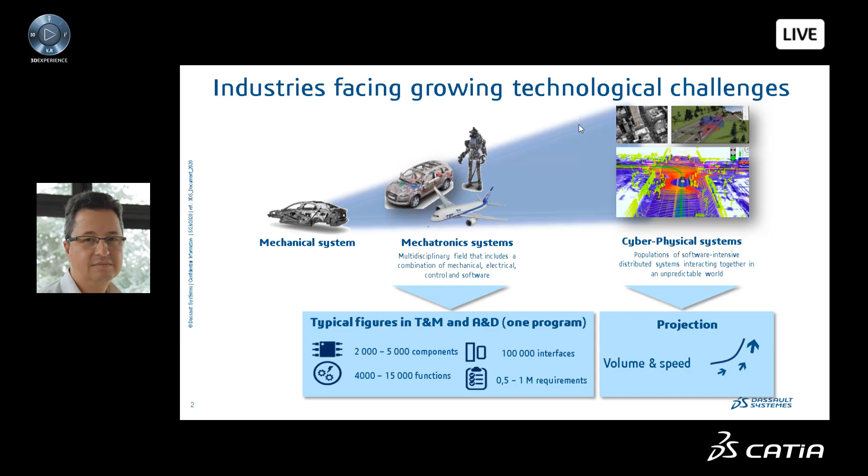State-of-the-art practices of system engineering is mainly document-based in the industry. The drawback is: how can you ensure that all engineering documents are consistent together, how they are synchronized, how can you ensure that a given specification is consistent with a design, is consistent with a test, all of that with many updates at many levels, at many disciplines in the time frame. Also, many errors are introduced in the early phases of the development program, and they are detected very late in the process. So how can we ensure that current state-of-the-art practices are suitable to this world of cyber physical systems?

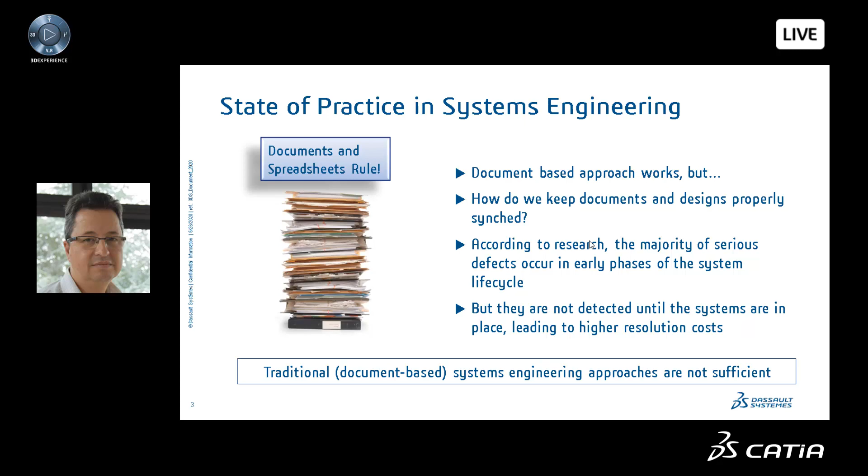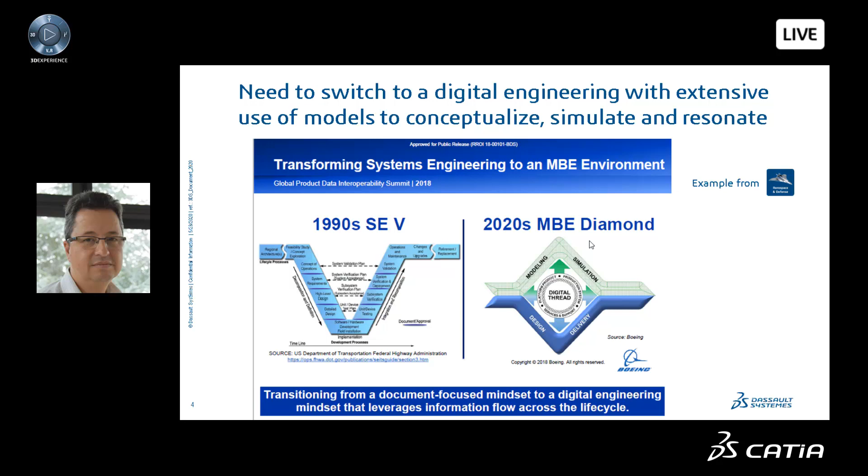The response is obvious. We need to switch to a digital engineering with the extensive use of models in order to resonate, conceptualize the future system and simulate it. Companies are transforming themselves, and we speak here about the digital thread, where we can have a digital continuity, a digital twin from the early design down to the delivery of the system and the in-service. Model-based system engineering is one of the first elements of this digital thread.

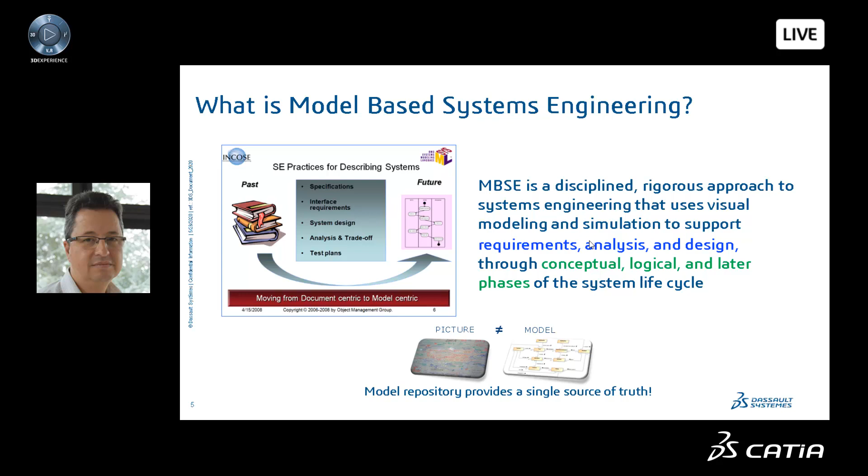MBSE is simply the use of models for system engineering. It allows covering different activities of the engineering, such as requirements, system analysis, design, etc. We speak here about defining a model, meaning objects that are reusable, where you can also simulate them, not about drawing pictures which are not a system engineering reference.

What you see here is a very short illustration of what is document-based system engineering and what is model-based system engineering. Model-based system engineering really helps you to resonate on your system. What are the scenarios of your future system? What is the behavior of the system? And then, of course, what are the requirements of the system?

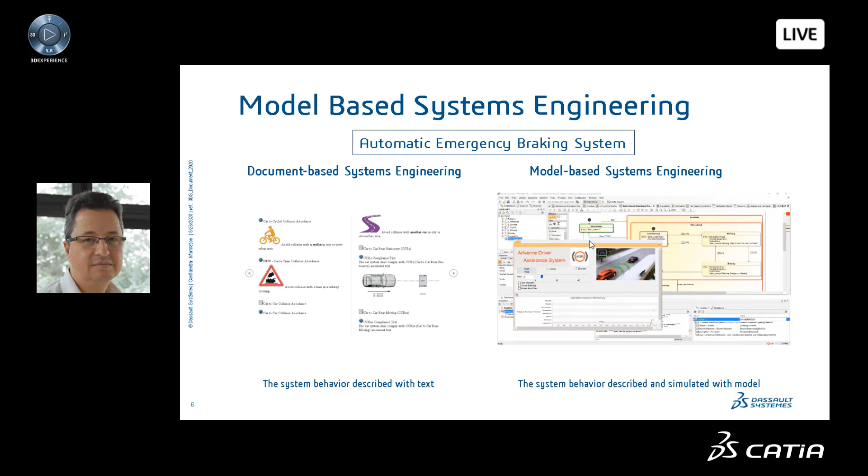And the system model is key. It's key because it helps you to define your targets, your scenarios, your missions. It helps you to define the interfaces between the components, and define the behavior of the interfaces dynamically so that you can drive the design of the product with all the disciplines. So it means that you can specify: from the system model, you can define system requirements so that you can specify the different components and the different behaviors that the components will have.

Also, it helps you through some simulation to make system analysis, to simulate the behavior of the product very early in the conceptual phase where you don't have any product. And also later on, when you have some first virtual component, to simulate progressively to achieve integration, verification, validation, and to ensure that you meet the targets defined early in the program. Of course, this needs to involve all the ecosystem, the value network. It's about collaboration between disciplines, but also between the suppliers and the OEMs.

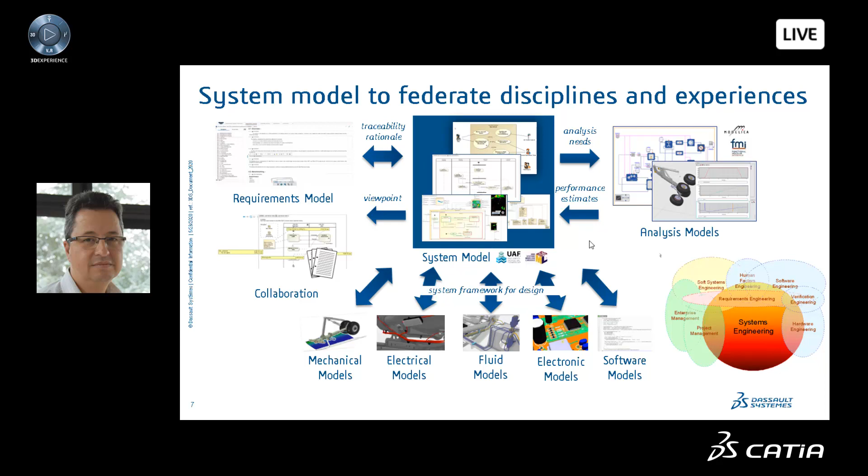To achieve MBSE, you need best practices. That means defining proper system engineering methodology, supported by some tools. We have developed at Dassault Systèmes a methodology called MagicGrid, which is applied to the Cameo Systems Modeler, and now extended to overall development with Cyber MagicGrid.

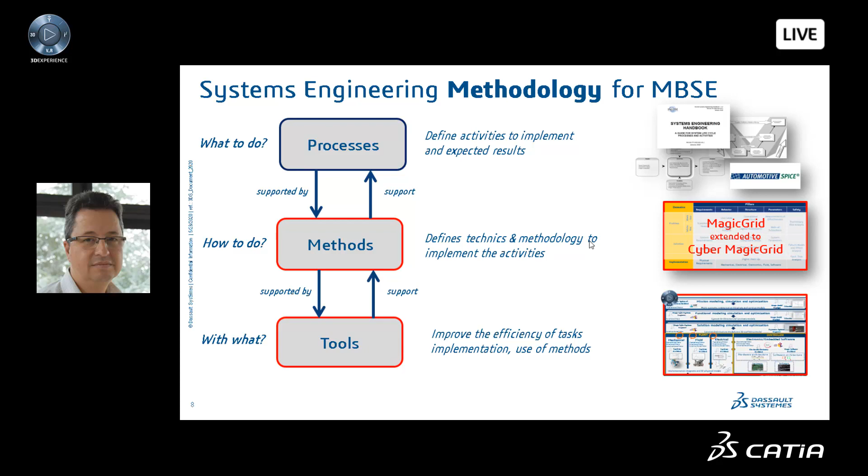The principle is simple. You define a framework so that you can manage different layers of abstraction, and for each layer of abstraction, you define different pillars, different points of view, so that you can see your system against these different points of view. This helps you ensure a complete and consistent analysis and definition of your system.

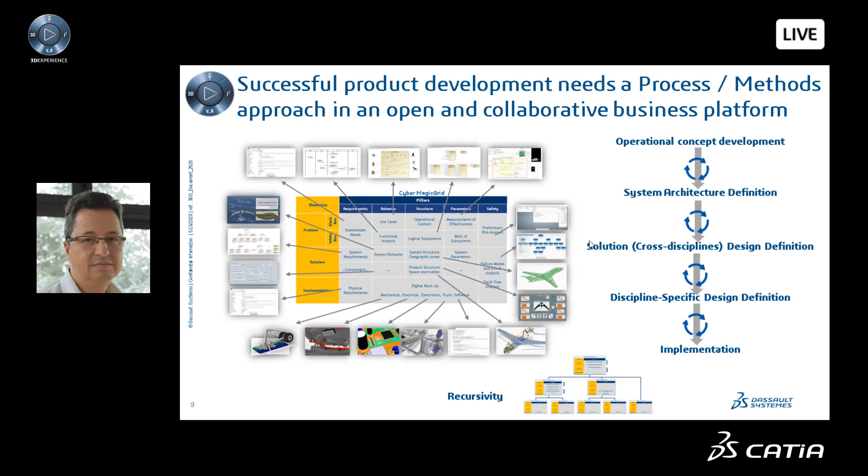The benefits of MBSE are really to master complexity, master interfaces, considering both the static and dynamic aspects. Also, if you have proper best practices in a modeling and simulation approach, it helps you manage uncertainties all along the development process.

With simulation, you can take front-loaded decisions so that you can mitigate risk very early in the development process and avoid reworks and redesign late in development.

Also, with proper end-to-end traceability, you can really master the impact of a change, considering both a change on the needs and a change on the implementation or design of the product.

And it also helps you globally reduce your rework loops so that you can be more efficient and develop a product right the first time.

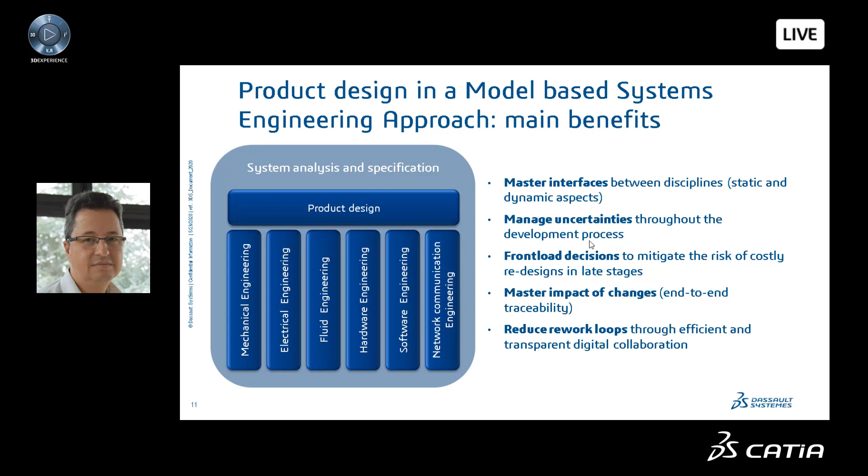Hi, I'm Rokas from CATIA NoMagic, and today I will give you a demo of one of the best SysML modeling tools in the market, which under the CATIA Magic portfolio has a name: Magic Cyber Systems Engineer. In today's demo, I will show you Magic Cyber Systems Engineer combined with Magic Model Analyst.

With Magic Cyber Systems Engineer, we will be creating the system's functional and structural architecture, and using Magic Model Analyst, we will do the model execution. In other words, there is code-free model simulation, validation, and requirement verification, which you can do in early stages of the product or system development lifecycle.

For our demo, I have chosen the advanced emergency braking system as context - a system which can automatically detect potential forward collision, and activate the vehicle braking system to decelerate the vehicle in order to avoid or mitigate the collision.

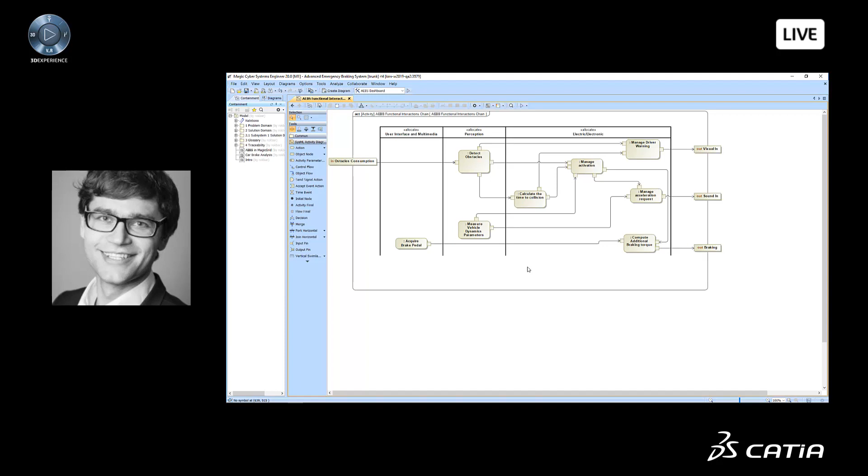And when we go to the white box, into the details, we have the logical architecture. This is very high level, just identifying the main systems or subsystems of your system of interest, and the functional analysis, where you identify the functions and define the behavior you expect from a very high level. From operational analysis context, we can also have some kind of breakdown structure, like a functions breakdown structure.

Then we go to the solution domain. In solution domain, there are requirements, the system level requirements, and there could be lower level requirements for a subsystem, etc., which we usually derive from the upper level requirements. Like in this case, you can see that the system level requirements are derived from the stakeholder needs.

One example I will take is the requirement: CCRs compliance test, TTC less than or equal to 10 seconds. What does it mean here? The car-to-car rear stationary compliance test, when time to collision is less or equal 10 seconds, it should show the warning mode. Here we can also see which elements are satisfying that requirement, or even some test cases which are verifying that requirement from the model.

What is really nice is that you can connect not only the elements but also some of the relationships. Like in this case, there is a transition which is used in the state machine to transition from one state to another state.

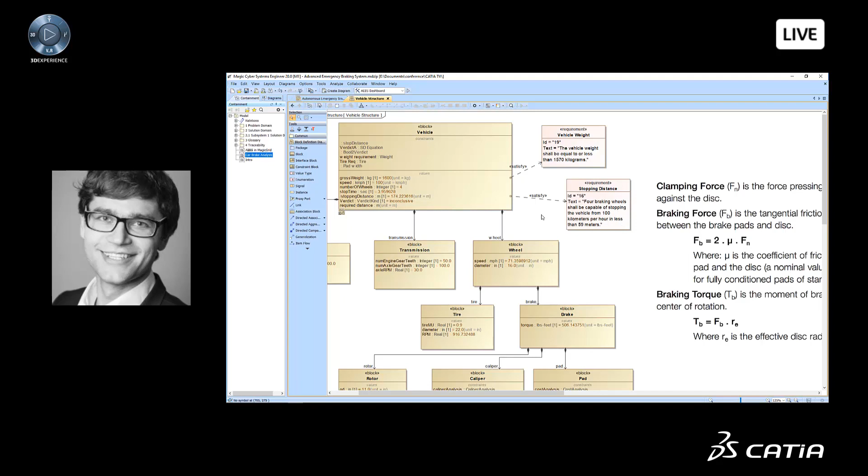And there are requirements saying that 4 braking wheels shall be capable of stopping the vehicle from 100 kilometers per hour in less than 59 meters. So we need to consider that requirement and see how we can calculate that. For that purpose, we are using the SysML parametrics diagram, which gives you the capability to define calculations. And here, as you can see, there is a stop distance calculation, the formula, which uses input values like gross weight, speed, and others in order to calculate the stopping distance.

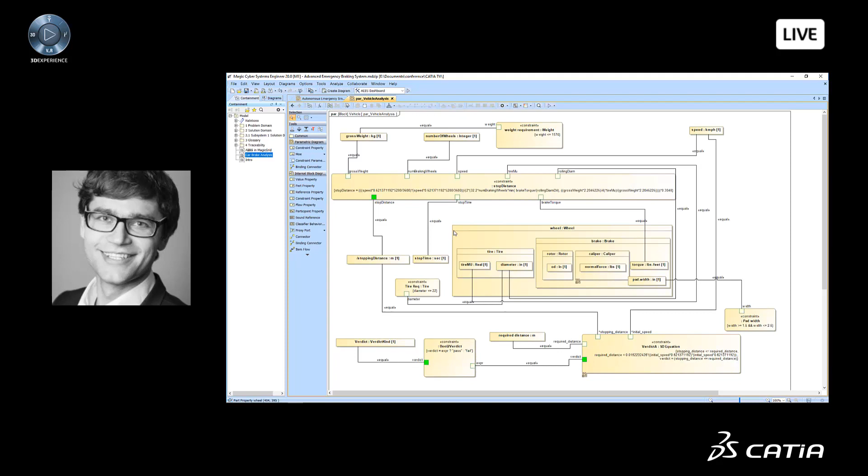After the stopping distance is calculated, it is sent to another constraint, where we compare the stopping distance with the required distance in order to have the final verdict: did the specific configuration pass or fail? As for the requirements, I was already showing them in table format, and we can play around with different views. You can see requirements in the diagram, display them in tables, and show different columns to display additional information and metadata. And here we see that the stopping distance requirement is satisfied by the property stopping distance, and is also refined by a specific constraint and, from the functionality point of view, by the activity apply brakes.

And in order to display the functionality using simulation and also bring in some nice widgets, we have a cost-free plugin which is capable of running JavaScript HTML widgets. We call it Web Server for Cameo Simulation Toolkit. And I will show you how easily you can add an additional widget in order to display the value of a specific property.

So we have some predefined widgets library, and I'm taking one widget, connecting that with the property which I want to display, and then hiding that property. Hiding that connection, and of course I need to give a name of my widget, so it will be required distance, and also I will hide the type. That's all. So I'm ready to run my dashboard and do the car brake analysis.

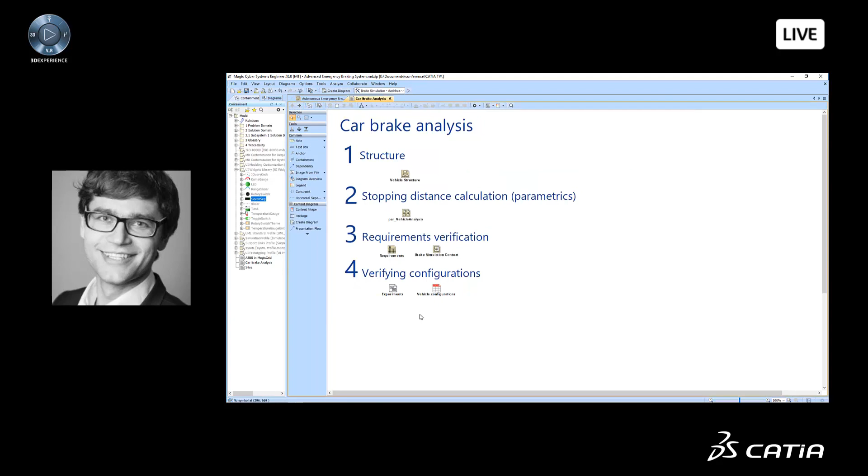And in such case, as a system engineer, you can work and analyze the requirements, and also figure out which combination should be for your car, for your tires, etc., in order to satisfy the requirements. The other way is that you can have multiple configurations, and these configurations can be failing some specific parameters, etc. And we can calculate that using the same parametric diagram.

Let's say that I need to increase these numbers, and I can re-evaluate. So I do re-evaluation for each of the columns, and what we see is that we're failing. Two combinations are failing as a final result. And I can also work with the Excel spreadsheet, which means that I can save my configuration to the Excel spreadsheet, send it to my colleagues, who can work forward and bring another configuration.

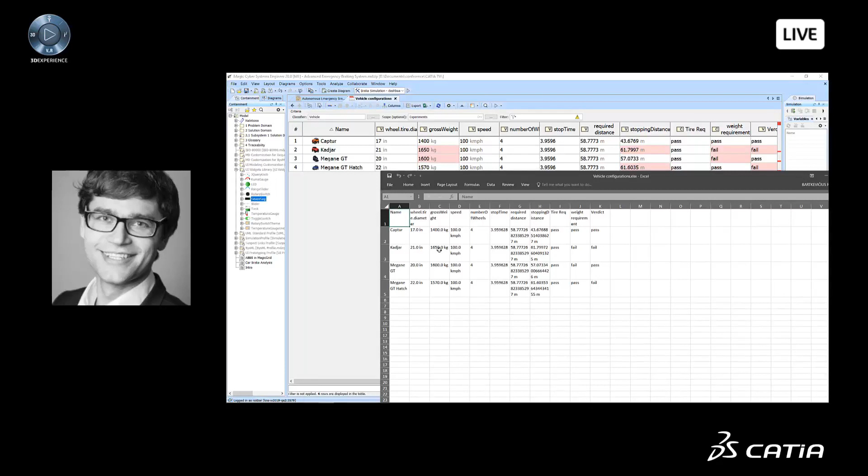So let me just export that Excel spreadsheet, and I say that okay, we will reduce the weight, and we will reduce the wheel diameter, saving that Excel and reading from file. So reading from file, we are getting the values which were in the file, and then we can re-evaluate again. Before that, let's remove the Excel import status legend and re-evaluate, and we see that actually all the configurations are passing for the stopping distance, but the problem is with the gross weight.

So at last, I want to focus on the traceability part, and as you know I was already showing some requirements which are traceable with your logical and functional architecture. This traceability is actually for the systems engineers, in order to trace all the model elements. And if you want full-scale traceability at enterprise level, it can be achieved using the 3DEXPERIENCE platform, the traceability between different roles and disciplines also.

And here I'm finishing my demo and giving over the stage to my colleague, who will show you the full-scale traceability in the 3DEXPERIENCE platform. Thank you.

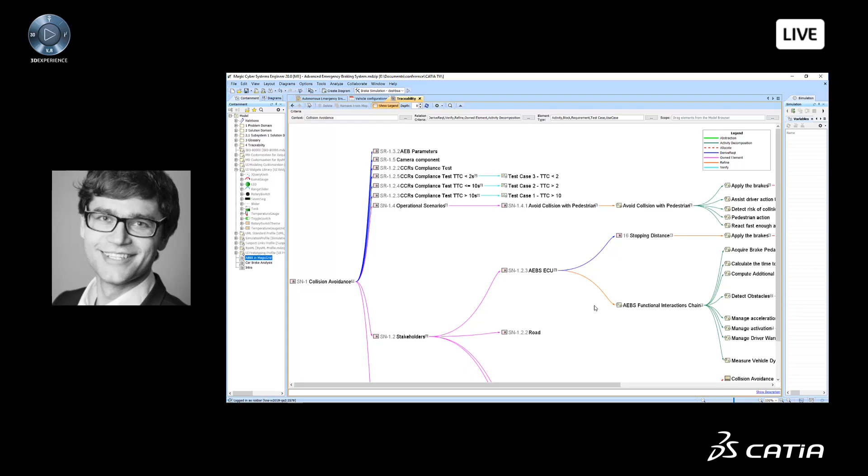Hello, I will introduce you to how to manage collaboration within the 3DEXPERIENCE platform using the roles Systems Traceability Engineer and Systems Traceability Analyst. Those two roles provide an app that you can see here that is available as a widget of the 3DEXPERIENCE platform. There are three pillars of collaboration: sharing data, traceability analysis, and reviews. And I will introduce how to manage those three pillars using this application. First pillar, sharing data.

So systems traceability enables you to preview models based on connectors to a various set of solutions, like Cameo, Simulink, Microsoft Office, or other solutions like IBM Rational DOORS or Rhapsody. We have more than 30 connectors available as of today, and the list is increasing release after release. So here, as an example, I can navigate through a Cameo model. This is a Cameo model that was presented to you just before by Rokas, and I can navigate through it as if I have a Cameo solution.

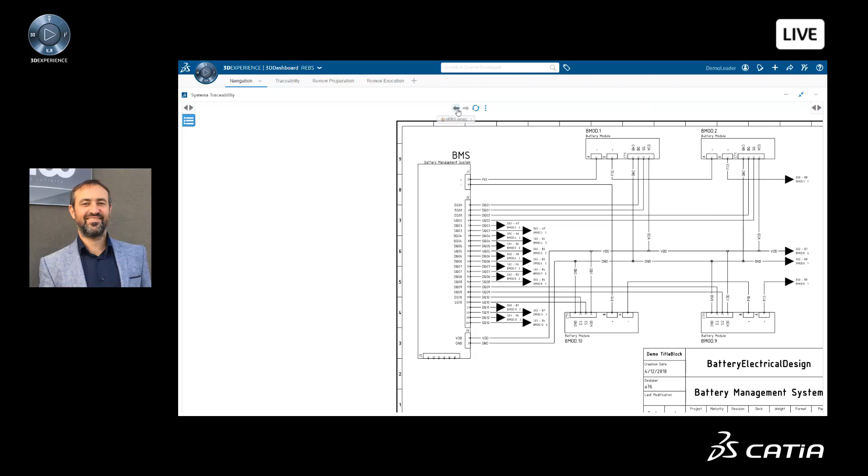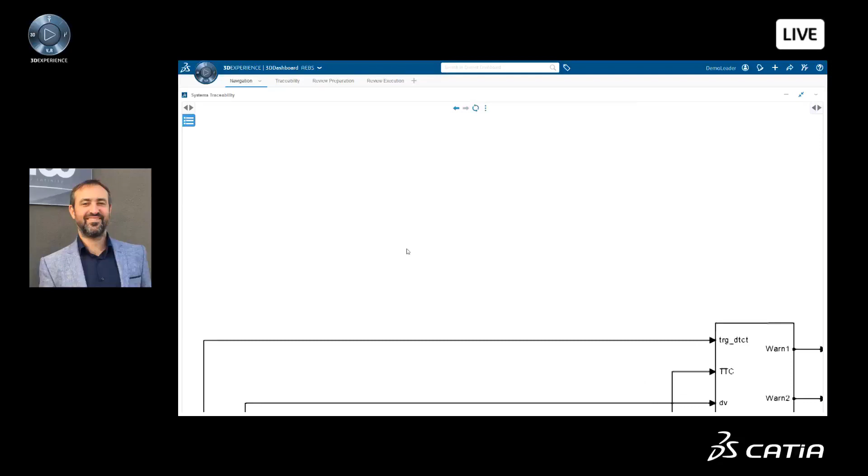As you can see here, I can read a schematic. Here it's an electrical schematic, or a Simulink model. And also access the properties.

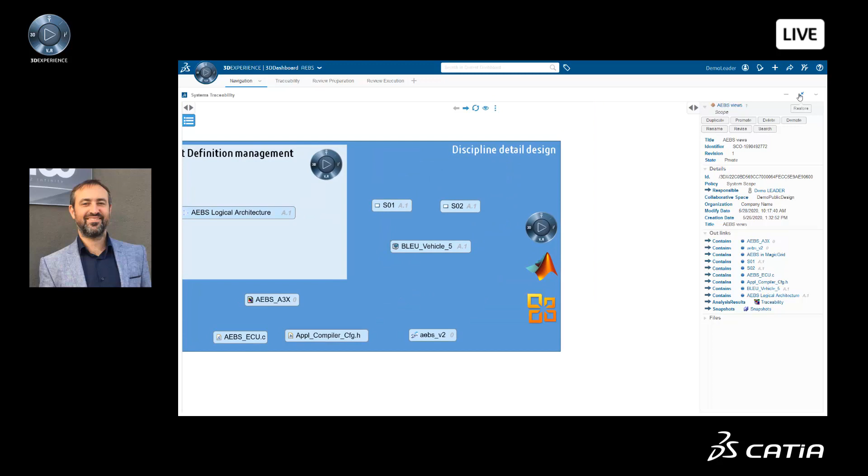C code coming from AutoSAR Builder. For the 3D object, here I can read the product structure, but if I want to see the 3D, I advise you to use the power of the collaboration between widgets, and you can load the data to a widget called 3D Play that is available within the 3D Experience platform and that supports the analyzing of the 3D.

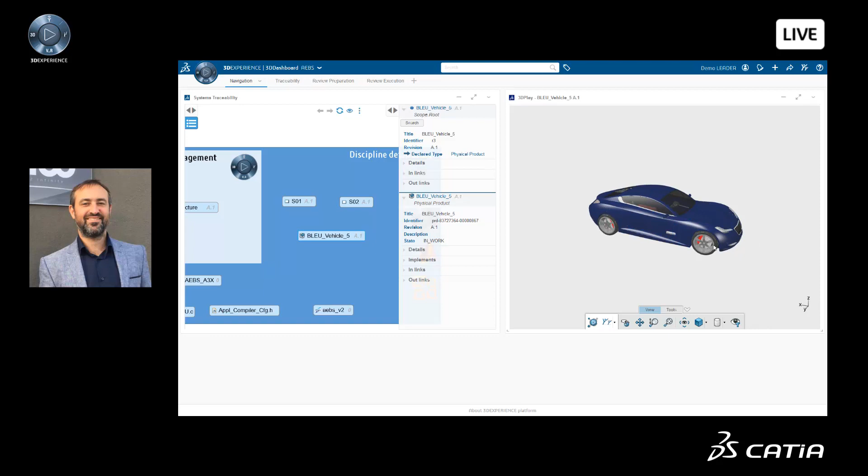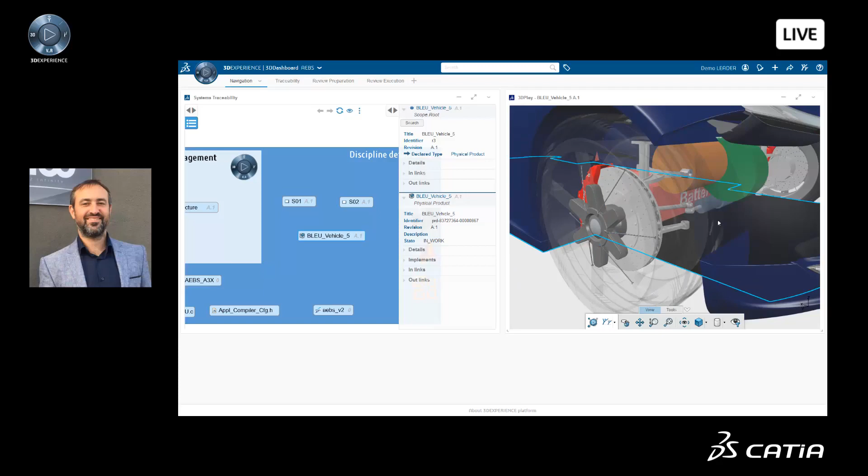So as you can see here, you can use the power of the 3D Play. You can filter the data. And for example, here we are talking about AEBS. I can see the 3D design of the brake. You see? I can have a look at it more into detail.

Second pillar of the collaboration is the traceability. So still based on the connectors of various sets of heterogeneous models, this solution enables you to create and analyze the traceability between those solutions. So as you can see here, systems traceability uses the concept of a scope of data. Here I created a scope of data using a subset of a Cameo model here, a subset of a logical architecture here, and a subset of the discipline detailed design.

And the gray arrows between those model elements are called channel, and the channel supports the traceability analysis. So I'll show you. Here I have an indicator that tells me that I have some work to do, and by double-clicking on the bubble, I can see the traceability between elements. And if I select an element, I can navigate and analyze the traceability. Okay?

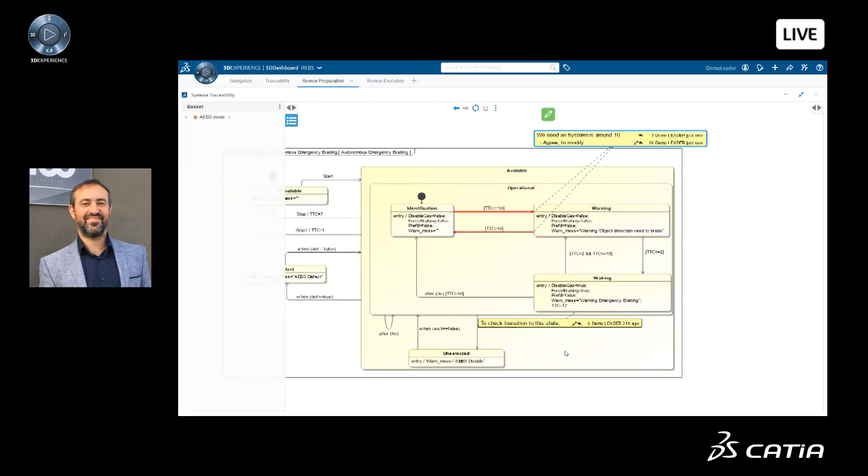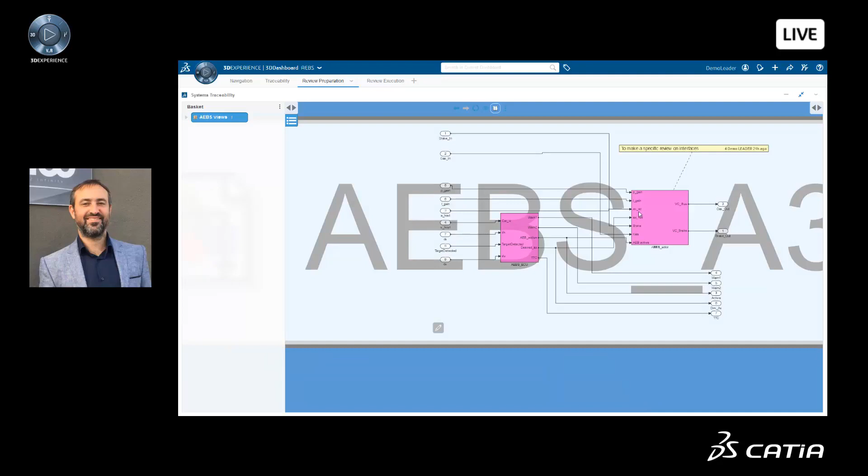If I navigate through the models, so let's go down again into system behavior, you can see that some comments already exist. I can answer them. Or I can add new comments. You can put comments on any object available and read by the 3D Experience platform. Here is a comment on a Simulink model.

Or you can put comments here. I will put comments on the logical architecture. Those comments exist already. And at the end, once you've shared your comments, you can read all the comments in a table. Okay. Then, what you can do is use the power of the 3D Experience platform to read the comments and see them directly in the context of the model.

Based on that, you can take decisions. So for example here, this comment is about: we need a hysteresis around 10, okay, between those two states, and someone else agreed to modify. So I can close the discussion by saying that the hysteresis shall be added.